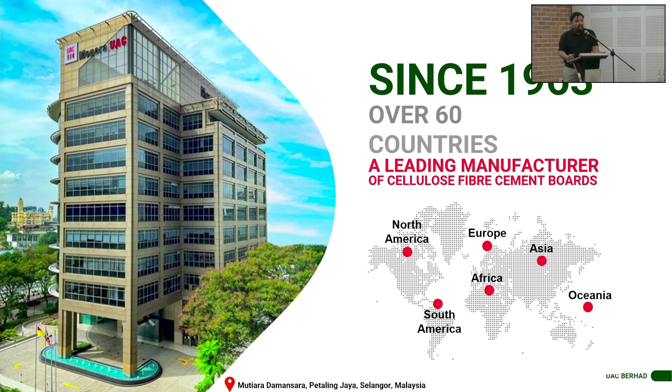I will start with our office. Our office is located in Mutiara Damansara, just nearby the Curve, beside IKEA. We've been in the market since 1963, so almost 61 years right now. Not only do we supply our fiber cement board throughout Malaysia, we currently also supply throughout the world. The most board that we export outside is to Taiwan and also England. This is because the demand is there. The usage of fiber cement board in Taiwan is very high, mostly for drywall application.

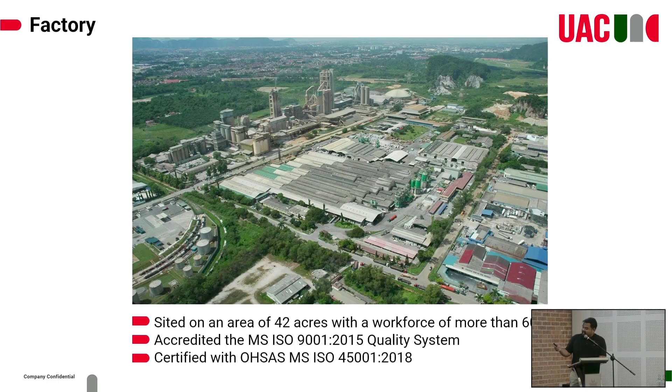A little bit of knowledge, where is UAC from? UAC Berhad is under LTAT Armed Forces and fully owned by Boustead Holdings, so we are a subsidiary of Boustead Holdings. This is our factory located in Ipoh, about 42 acres, beside Tasek Cement. As you can see, all our fiber cement board since 1963 has been produced here. Why is Ipoh the best place? Because the raw material sand contains more silica compared to other parts of Malaysia. That's why our factory is located in Ipoh. In terms of supply, everything should be no problem for local and also outside, because we already cater throughout this year. We also have MS, ISO certifications, everything.

So what is actually fiber cement? It consists of cellulose fiber from pulp tree, cement, sand, water, and some additive. After, if you can imagine, you just want to bake a cake, you put it in the mixer, depending on the thickness. If you require thinner boards, we produce the thinnest one at 3.2 mm, and the thickest one is 25 mm. Depending on the thickness, you can have various applications and various products that can be profiled and used.

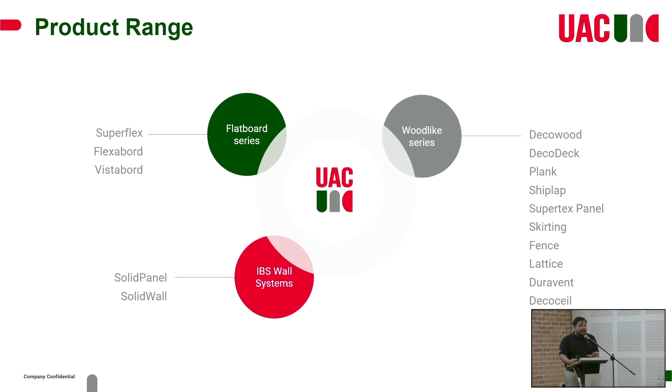For UAC itself, we have 3 types of product range. One is the flat board series, our Superflex, Flexabord, and also Vistabord. This is for ceiling application and also drywall application. Another category is the IBS wall system, which includes our solid panel, the precast for replacing clay brick or conventional bricks, and also our solid wall, the in-situ system. Another type of range is the wood-like series. This is what I mentioned, to substitute as an alternative for you all, because the nature of fiber cement board is, of course, termite-free and water-resistant. This is the advantage of using fiber cement board. Because termites cannot bite the cement, that's why we can replace or substitute for wood.

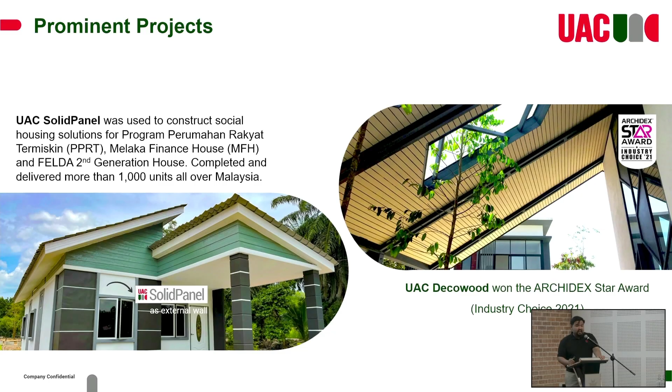For UAC itself, we are also very committed towards ESG. From 2019 until 2024, we already reduced about 12% of carbon emissions. UAC also wants to become zero emission - that's our goal towards ESG.

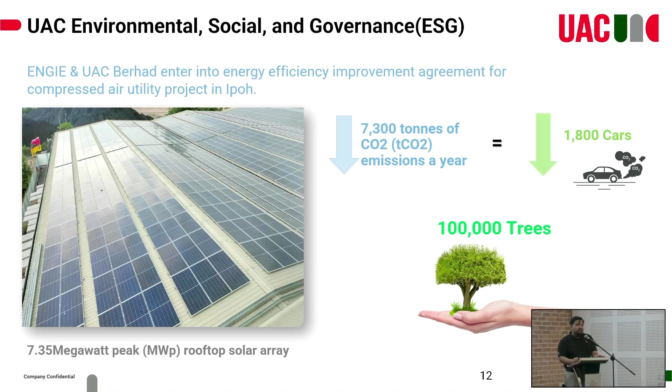In our factory currently, all 42 acres are using a solar system in order to complete our ESG goal. As you can see in the picture, currently we managed to reduce about 7,300 tons of carbon emissions, which is almost similar to planting about 100,000 trees. So when we use our solar system in our factory, it can definitely reduce carbon emissions.

I would like to talk about IBS wall first. After that, we're going to our flatboard series. After that, I will show you about our wood-like series. UAC IBS wall is actually an alternative instead of using normal conventional bricks.

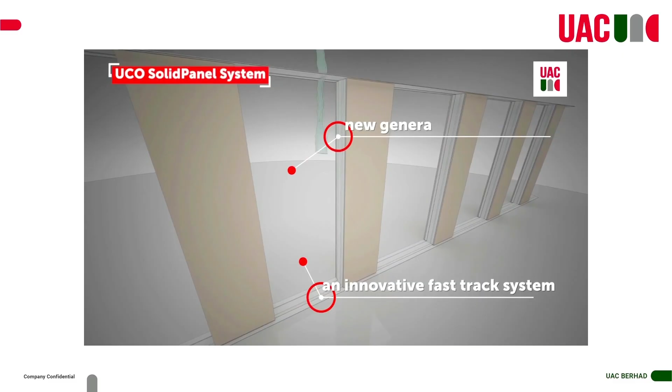I will share a video first for all of you to have a look. This is the UCO SolidPanel system, an innovative fast-track system for the new generation of walls using the latest and best construction technology. The system is revolutionizing the way walls are built. UCO SolidPanel system is an industrialized building system, IBS, certified to the maximum score of 1.0 by the Construction Industry Development Board of Malaysia, CIDB. It delivers benefits that surpass conventional masonry without the disadvantages.

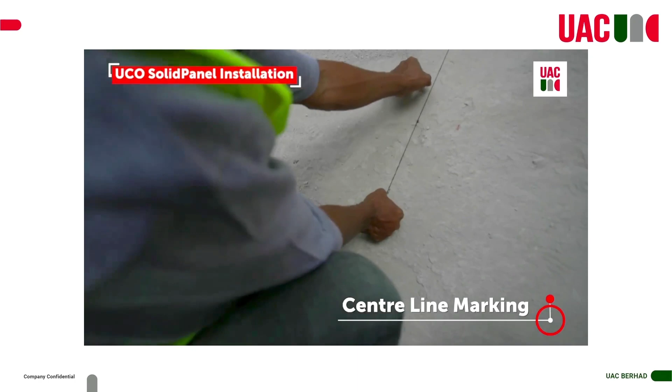The installation of the UCO SolidPanel system is as follows: plotting wall layout with the use of a laser marker or plumb line, transfer the marks onto the soffit. Fix top metal track to structural support and bottom metal track onto the floor using mechanical anchor bolt or approved equivalent fastener. Mark and cut the panels for installation. Move the panels into position. Tilt the panels to enable top tracks to slot into the cells. Mark the door and window opening to install door and window frame.

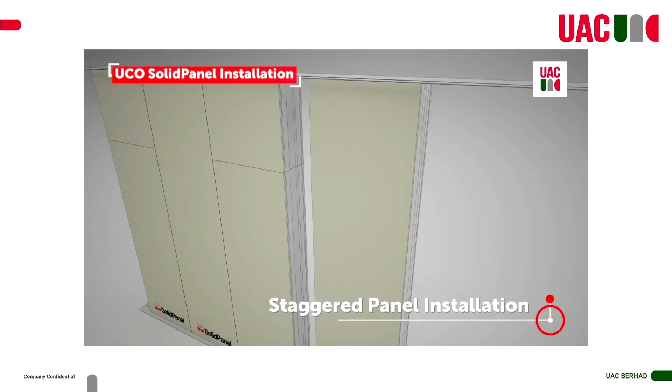Install the panel. Insert rebar for staggered panel installation method. Plumbing and electrical services can be easily installed where required. Patch with cement mortar after installation. All joints to be flush jointed with perforated paper tape and suitable jointing compound. For fixing with heavy anchorage, kindly refer to UAC's recommendations. When completed, the UCO SolidPanel system can accept a wide range of finishes, such as wall claddings, wall coverings, paints, and tile-on application.

Conventional masonry has many disadvantages: labor-intensive and slow, involves messy wet works, and a lack of skilled labor can result in internal finishing problems. It incurs expensive and time-consuming cleaning up of waste materials created by wet works. There are often delays with finishing. In contrast, the system speeds up the installation process by up to 3 times faster than masonry.

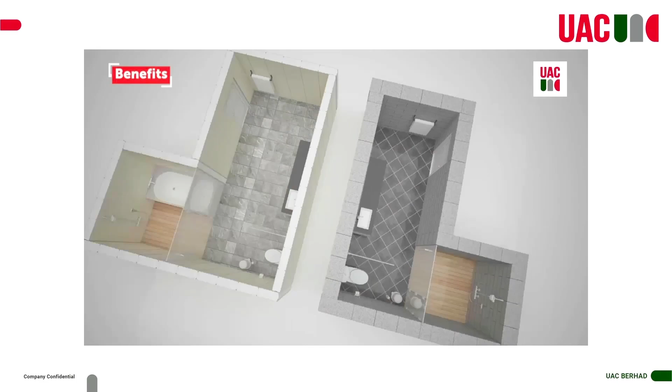UCO SolidPanel is ready to be fixed, with good sound and thermal insulation. It reduces structural construction cost by being lightweight, increases utilizable floor space, and reduces weight and thickness of the walls.

Minimal mess at site improves cleanliness and enhances site safety. Simple jointing ensures a smooth finish, no rendering is required. The result is solid and consistent quality.

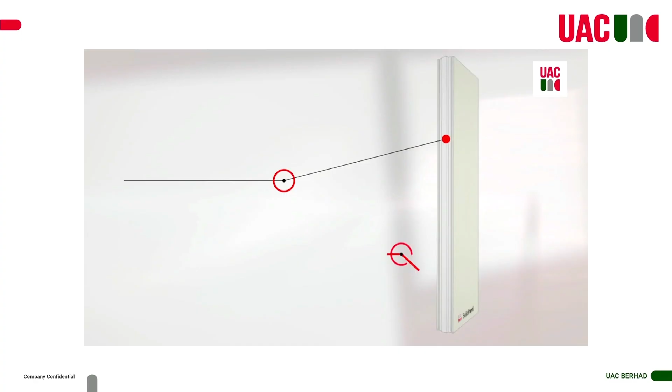Not only does the UCO SolidPanel system provide the solidity and sense of security of conventional masonry walls, it also passes the stringent and demanding requirements of wall performance tests under BS 5234 Part 2, including the sandbag impact test, door slam test, anchorage test, and heat and rain test.

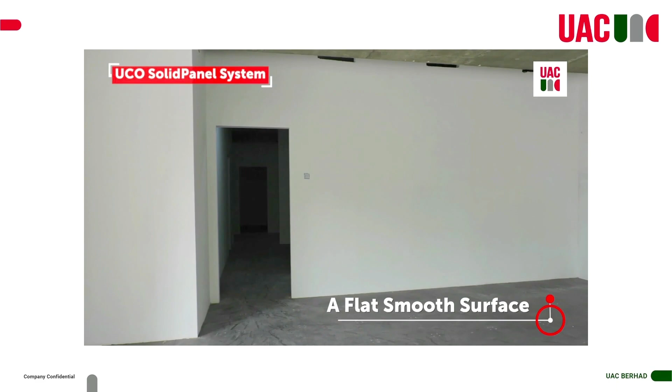The UCO SolidPanel system delivers lower construction costs, quick and easy installation, a flat smooth wall surface, solidity and resilience, and reduced waste. Its smooth finish makes it ideal for landed residential houses, high-rise apartments and condominiums, as well as commercial, industrial, institutional and leisure properties. Being lightweight, it has the flexibility to accommodate all types of floor plans.

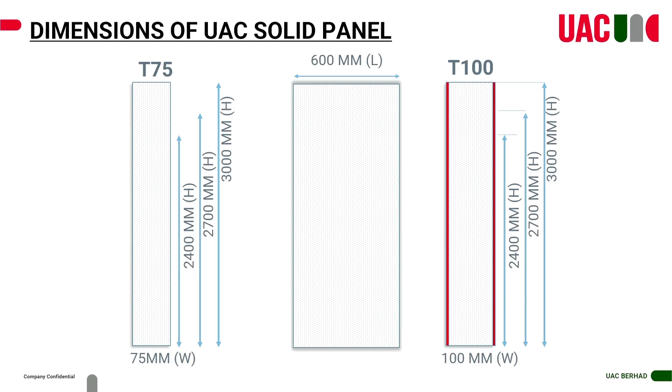Okay, this is more or less a brief introduction of how our solid panel UAC IBS wall looks. So the most important part: if you are using our solid panel, no rendering or plastering is required, because our board is our skin. That's why we do not need rendering or plastering.

So this is the dimension of our solid panel. We only have two sizes: one is T75, meaning 75 mm thickness, and another is 100 mm thickness. Our width is 600, or 2 feet, and we have three types of length: 8 feet, 9 feet, and 10 feet. The maximum we can go is only 3 meters.

So the composition inside our solid panel is expanded polystyrene, grade F, mainly for construction. If you have a lighter right now and burn it, the bits only shrink - it's not combustible. That's why we do have fire cert for this particular solid panel. Lightweight concrete, and also our skin is cement board, the thinnest one at 3.2 mm. Both thicknesses have certificate from Bomba, for the 75 mm and also the 100 mm thickness. Our density is about 700 kg per meter cube, which floats in water compared to water density of 1000.

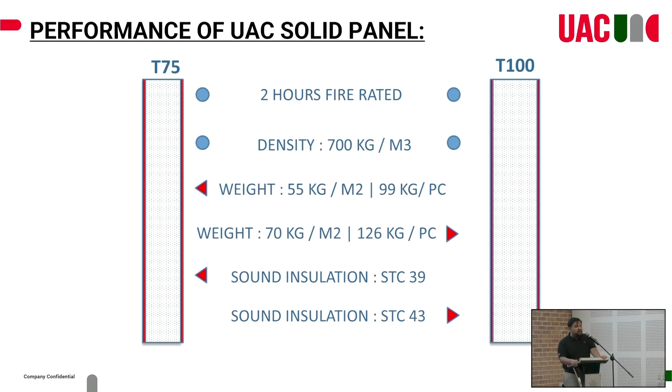If you are looking for a 4-hour fire rated wall, we also have the certificate from Bomba, using the combination double wall with T75 mm and an air gap of 50 mm. Without the air gap, you cannot achieve the 4-hour fire rating.

So if you are designing a hotel and need the requirement of STC 55 dB, we also have our acoustic performance wall combination between our solid panel together with our drywall application. Currently our total wall thickness is 159 mm, the thinnest in the market. For this particular wall, we supply to the TRX hotel currently. The opening date is about next year, January. It's almost finished at the upper level of the TRX, using STC 55 dB.

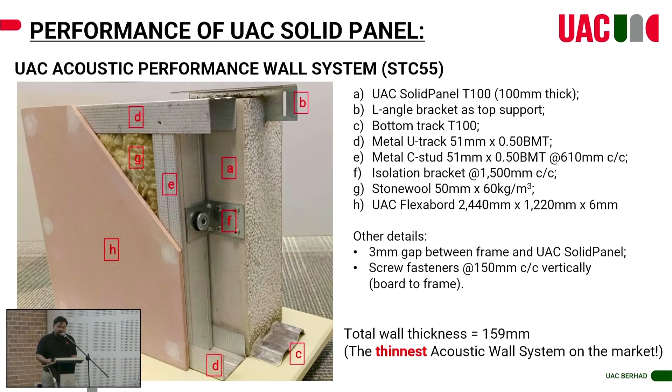So for the installation, I'll just recap what the video mentioned. It's normal, like conventional brick - you still need to mark the line. After that, you put the bottom track at the soffit. Why do we need the bottom track? To make the wall alignment, so you don't see the wall become like a snake later. That's why UAC implements a bottom track for this wall, so you can see your wall very smooth and straight in line, because our panel will sit on the bottom track itself.

So this is for box sub application - some example of how we just put the bottom track and then box the piping there.

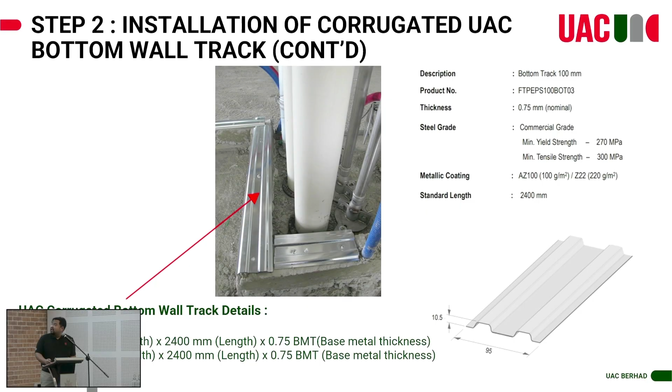So for installation at the top, we have two types of ways: one using U track, another using L angle. Why is that? Because if we use U track, you can see the lips there - if you have a particular shielding, you can cover it up. But if you don't have any particular shielding, we will advise using L angle like this, because in the isometric drawing, you can see our L angle will be embedded inside our panel, so you cannot see any lips at the soffit, on how to install our solid panel.

So this is the dimension for our L angle, and the illustration will look like this. You need to cut the panel a bit on the top side, then you just put our solid panel inside the L angle, so the L angle will hold between one panel and another panel.

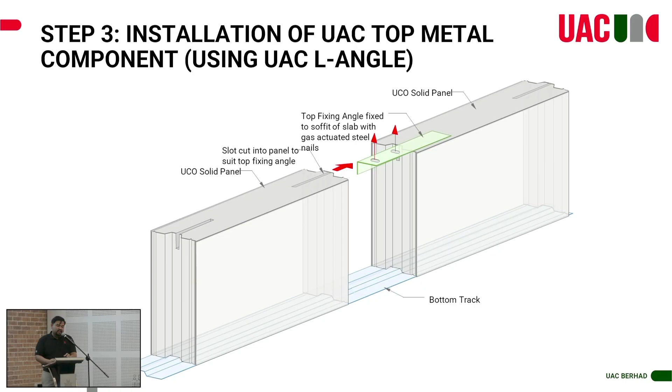So for workability, only 3 to 4 workers will be enough to install our solid panel. You don't need any machine for uplift or handling our solid panel.

For cutting everything, you just need to use a circular saw with a diamond blade cutter. So this is the dimension and method of installation.

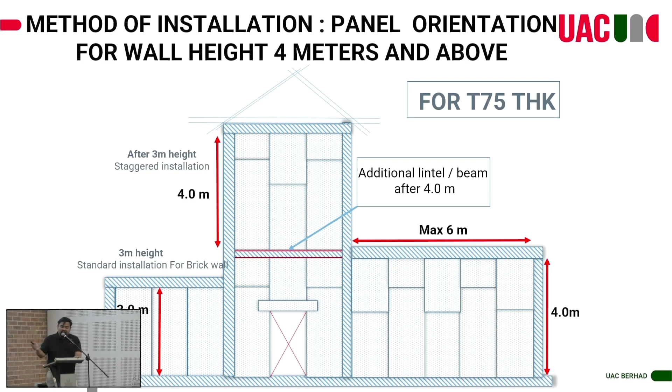For our solid panel, we don't require any lintel if we are using T75mm until 4 meters, compared to normal conventional bricks which are 3 by 3 - ours is 4 by 6. Above 3 meters, the panel must be installed staggered to improve and enhance the strength of the wall. If we use T100, we can go up to 5 meters without any stiffener or lintel, and the longest span is about 6 meters.

Between one panel and another panel, you must use cement adhesive to combine them, grade C2TES1. For the termination between another material, you need to use sealant. If the termination is between the RC beam or RC steel, also the same, you need to use modified sealant, MS sealant.

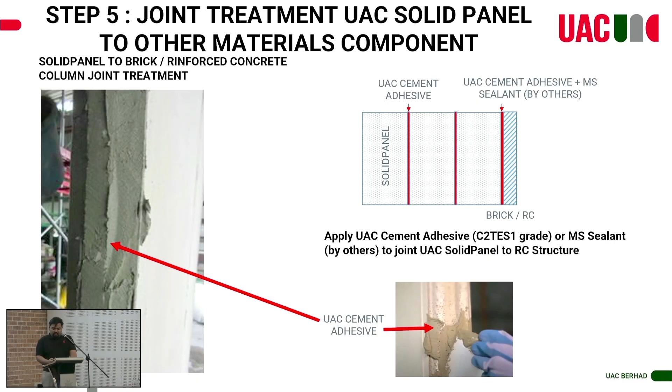Another advantage of our solid panel: you don't need to cast any lintel for door opening or window opening. This can omit the cost of the lintel - you just make our panel horizontal and it becomes the lintel already.

But there are some limitations for this lintel application. The maximum opening we allow is 2.4 meters, and the panel itself needs to sit about 200mm. So you can reduce the lintel cost, but only for normal windows and doors not more than 2.4 meters.

For penetration or installing conduits and everything, you just hack. If the requirement needs sealant, you put sealant; if it needs a fire collar or fire stop, you just put it - that's what happens. Our panel can be cut, should be no issue.

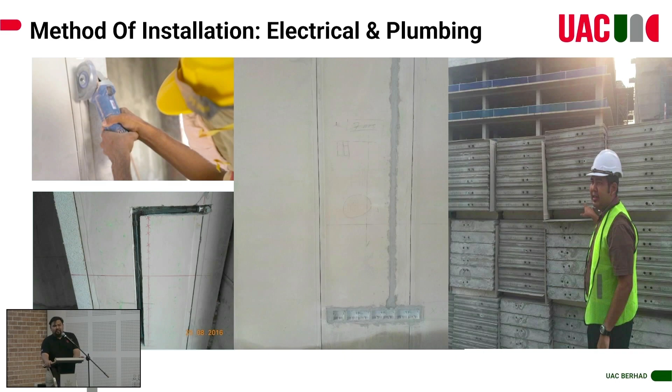For installing the conduit, even crossing from one panel to another panel is also possible. But our limitation for hacking the panel is: if you're using 100mm, we allow hacking until 75mm, and also cannot go back to back. If we're using 75mm, we allow until 50mm to be cut, and also cannot go back to back. That is our restriction or limitation.

So this is how it looks after completed. You can treat it the same as a drywall application - only termination is needed between one panel and another. After that, this is ready to paint already, no need for any skim coat or rendering on the external side.

So the illustration looks like this. First, you need to fill the gap between the panels using cement adhesive. After that, put the fiber mesh, and then use UAC jointing compound.

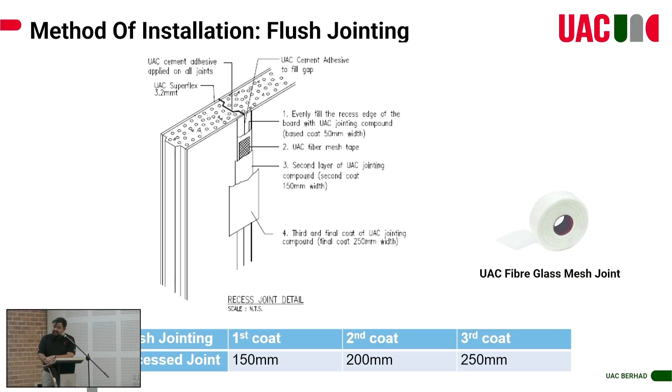For wet areas, either a drop or kicker is required, but the kicker only needs to be 50mm. You still need to apply waterproofing, same as with conventional bricks.

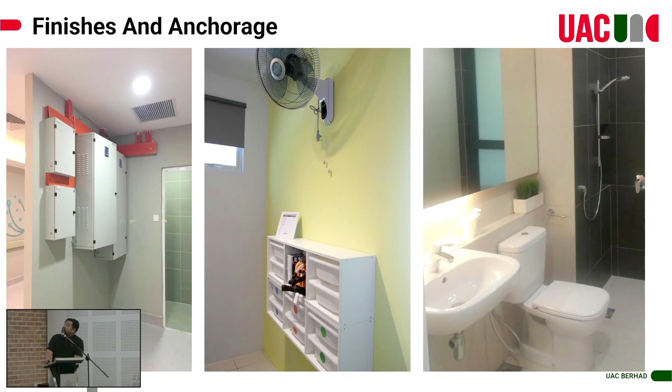In terms of strength and robustness of our solid panel, hanging a DB board, such as in the picture, can also be done, but there are certain tables required. For a wash basin or normal cabinet like this, only a normal wall plug can be used for installing on our solid panel. This picture shows how a compressor using just a normal wall plug can be hung on our panel. This is the table by Ramset.

If you can see, using M10 with a depth of about 50mm, we can go up to 0.19 kilonewton per point. So per point, using a normal wall plug can already cater to 20 kilos - should be no problem. If you need more than that, you can just use the ChemSet shown in the table below.

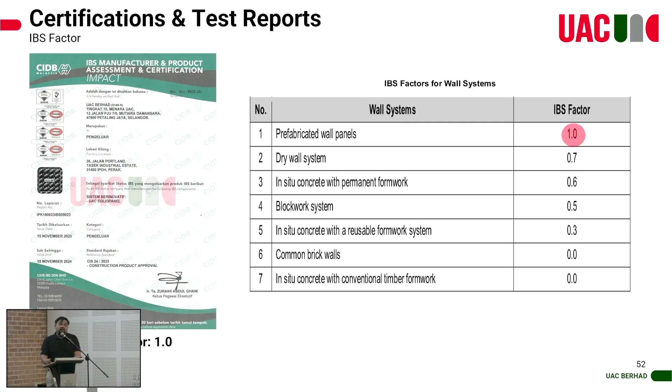So this is our certification for CIDB, IBS Factor 1. If your project requires scoring 70% marks for IBS application, this helps a lot because we consider full marks for the IBS factor for wall application. We're not talking about the structure application because mainly the 70% marks comes from the structure and also the wall.

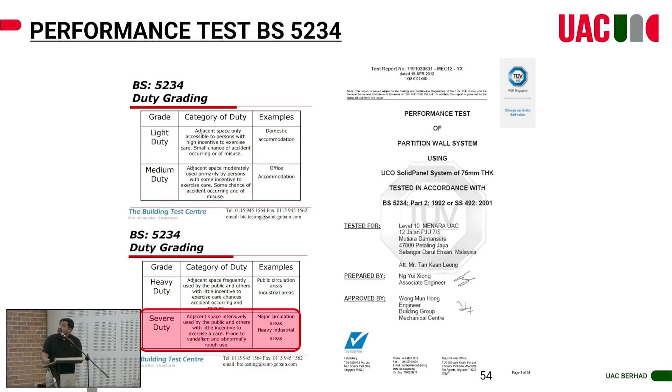So if you are looking for GBI cert, we do have it for this particular area. This is what the video mentioned earlier. The test that we done only using our 75mm thickness. Our wall falls in the category of severe duty, which can be used for industrial applications. So this is all the tests that have been done, and we already passed.

Even though our solid panel is a non-load bearing wall, we also test for load bearing wall because we want to ensure and show how quality our product is. So the test, we can go up to about 259 kilonewton for a single panel. So it's quite steady, our wall itself.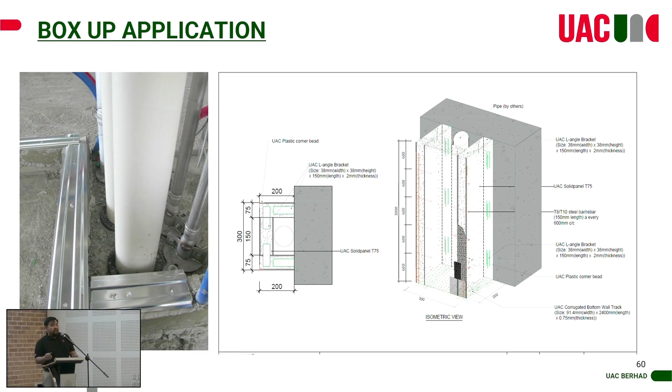So this is some illustration of how our panel works. Instead of laying bricks for this particular area, which takes a lot of space, if you are using our 75mm panel, you can fully utilize the space required for that particular area. As you can see in the left picture, the box up application can be very small. If you're using brick for that particular area, it consumes a lot of space. And then for UAC itself, we can also do openings there.

If they require some maintenance, we can design and put an access panel at the particular area. This is another example, the box up application that can be done for external application.

Another type of versatility of our solid panel is you can use it as a fin wall. Currently the trend right now is using the fin wall application at car park areas. As long as you have the parapet wall to anchor our solid panel, you can use our fin wall application. This is some example of where we already supplied our panel as a fin wall.

This is how the drawings look like, and UAC will provide this to the architect. And this is how we bind our solid panel, using either Hilti or Ramset system to bind our panel to the parapet wall.

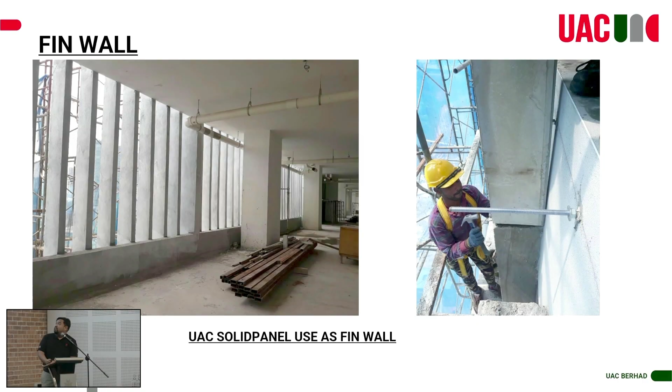So this is another example of what we already supplied in our panel. For this project, this is the combination between the shear wall application and also our solid panel as a non-load bearing wall. The white color is our UAC solid panel. They are using this, and for this particular project, because they were designing from the first place, we do have the test report. For this particular project, they managed to reduce the structure cost by 8% because of using our solid panel, since it's considered lightweight. Instead of using shear wall everywhere, you can reduce about 8% of the structure cost for this particular project.

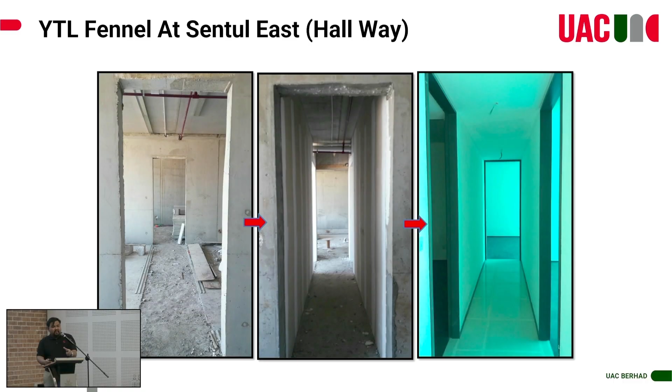So the picture shows you, if you're using clay brick with 150mm thickness, you cannot go out through the door already. That's why with our thickness, either 100 or 75mm, you can fully utilize and maximize the space required. So this is how it looks inside after finishing. It's quite smooth because our board is our skin.

So this is some of the lintel application that I mentioned earlier. Instead of casting another lintel, you just make our panel horizontal and it becomes the lintel already.

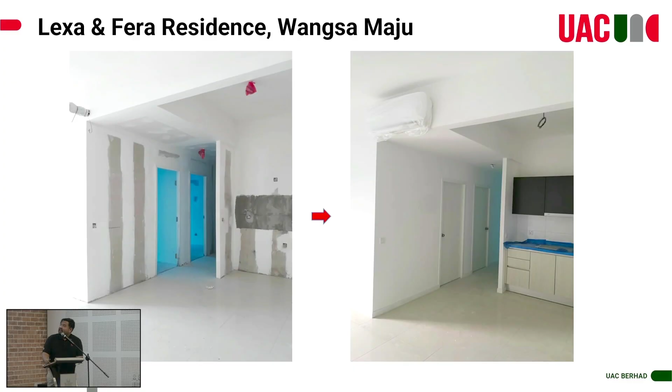So this is Lexa Fera at Wangsa Maju, using our solid panel application. You can see how the kitchen cabinet is hung there, and the tile also uses normal tile adhesive, which should be enough. No special treatment needed, you just put the tile adhesive, and then you can put the tile on our panel already.

See, this is some application. Akasa by Hapseng.

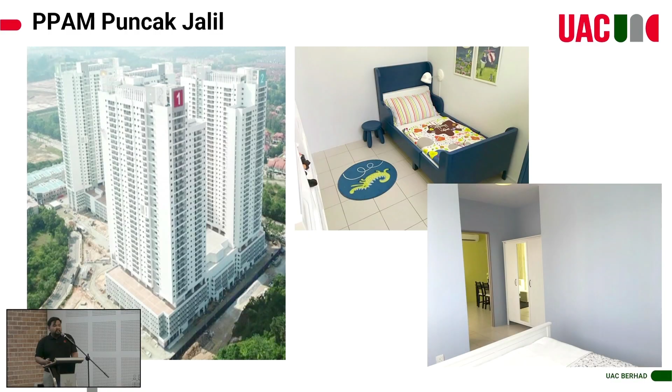Rumawip Setapak - and not only for high-rise, we also supply throughout residential projects. So this one at Setia Alam, they are using it for the internal wall. This is why they use the U-track, because they do have a ceiling for this particular area.

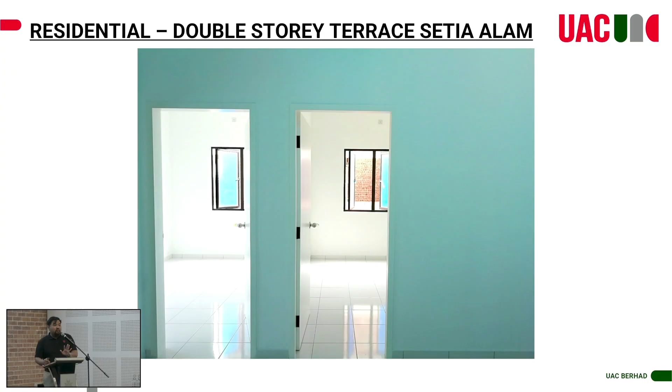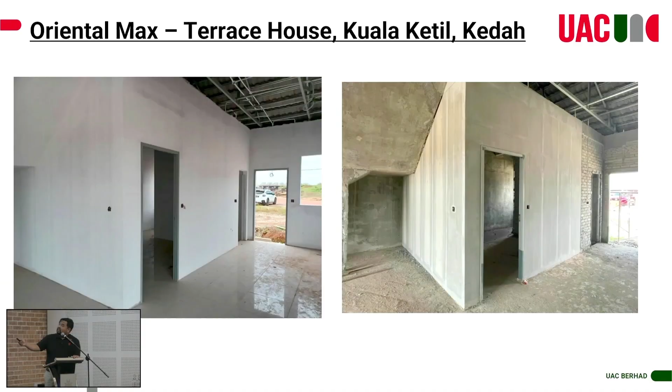This is all the residential, landed residential, using for the internal wall. So not only that, how competitive our panel is, we also can supply for affordable homes. So this shows you, we do supply for PPRT also throughout Malaysia. Not only that, Melaka Finance House - this is all the affordable homes that we supply our panel for.

TMB, Rumah Felda, Yayasan Perak.

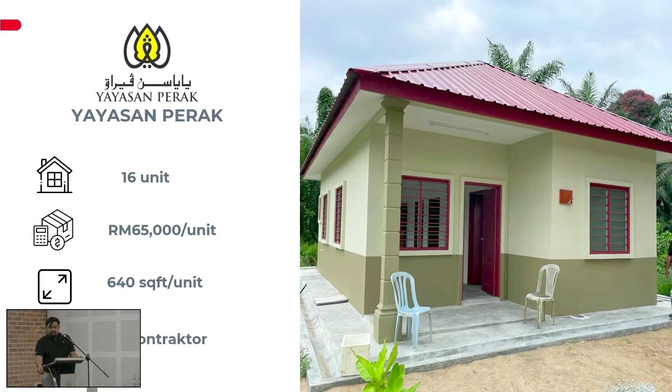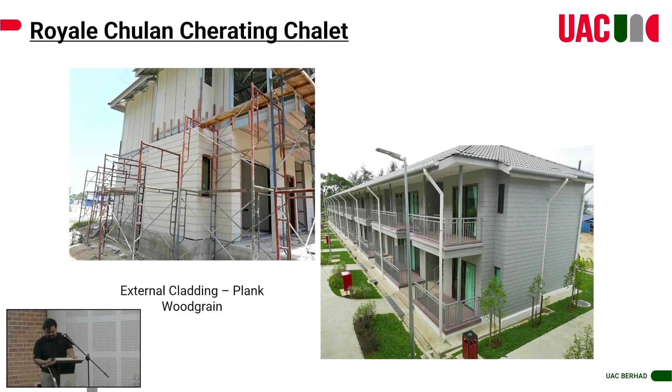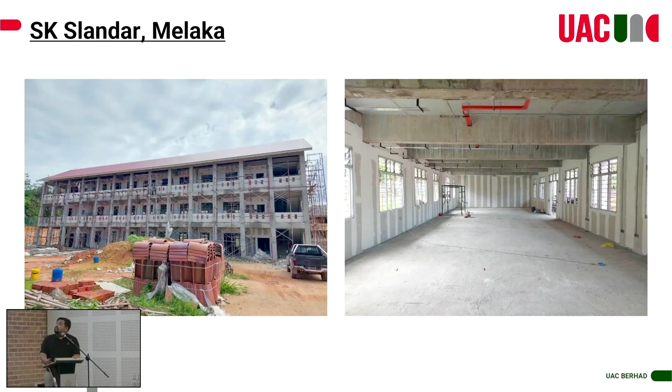Sekolah Kebangsaan Pairawak Kedah, Sekolah Hamzah - this is all the schools projects. Not only Peninsular Malaysia, we also supply to East Malaysia. Paragon.

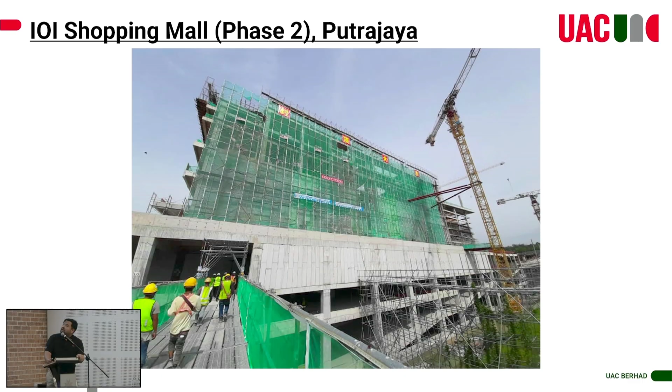For commercial it also helps a lot because there's quite a lot of partitioning inside. Some examples - Pekan Rabu, and also IOI City Mall for phase 2. Everything is using our solid panel, even though COVID was happening during that time, they managed to finish because of using our particular wall. IOI City Mall, Nucleus Tower, MBO. But for the acoustic, for the cinema, you still need an acoustic consultant to put their acoustic panel.

BHP, industrial. So before Gamuda made their IBS factory, they used our solid panel as a wall for this particular project, because it can really go fast. You can imagine, if let's say it's 12 meters there, if you do plastering work, everything is quite tedious, and the cost is also very high for plastering at that high wall. So if you use our solid panel, the plastering and also the skim coat can be omitted. That's why you can have a high wall like this built in a fast way.

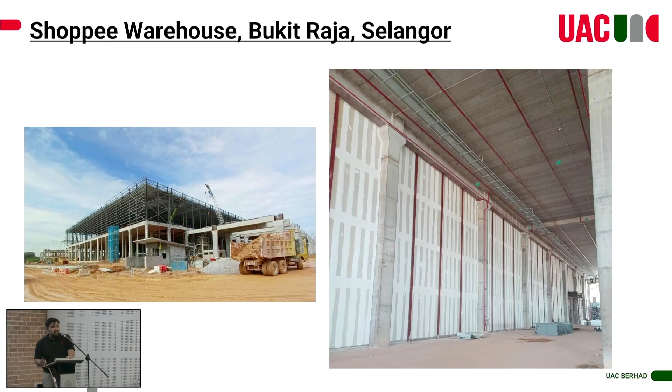Top Glove factory at Banting. This one, Shopee warehouse - mostly industrial will have a lot. Currently we supply at the data center. We managed to finish about 300 square meters per day for the wall, installing the wall panel itself, with a team of 10 people. So currently at Sedenak, they're using our solid panel as a wall - this is inside.

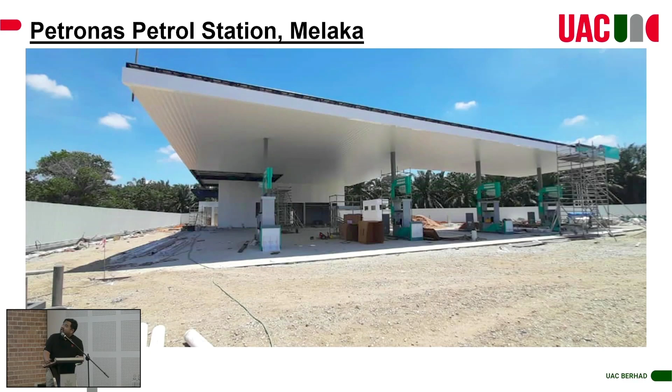Modular construction - if we are looking at modular, normally we collaborate with another party, let's say the hollow section supplier. We collaborate with them - you put our panel inside and just bring it to the site. Normally for the Petronas petrol pump station. This one is at Pengerang, also using the modular concept. Before this was meant for executives from Petronas to stay there. After the project finished, right now it's become a hotel already for this particular area, using our particular solid panel.

Hospital by KPJ. This shows how the DB board can be hung. And also the army camp we just finished for Sendayan.

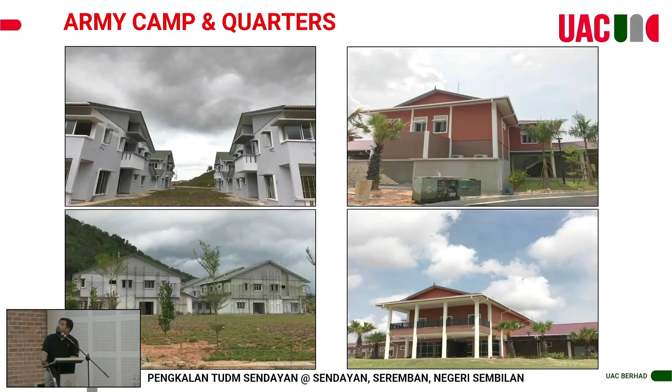Another way you can use our solid panel is for fencing, instead of laying bricks for this particular area. It's a balustrade. Okay, that's all for the IBS system.

So I will touch a bit on the flatboard series, which is considered bread and butter for UAC since 1963. We have Superflex, and also Vistaboard or Flexaboard. Why are they different? Because Superflex comes with a square cut, compared with Flexaboard or Vistaboard, which has a recessed edge between the boards. So Flexa and Vista are mainly for seamless application. If you're okay with butt joints for everything, you may use Superflex - normally Superflex is for roof eave application.

So currently, UAC before this only supplied the board. Currently for UAC, we supply together with the framing system, and we also give the warranty by the system.

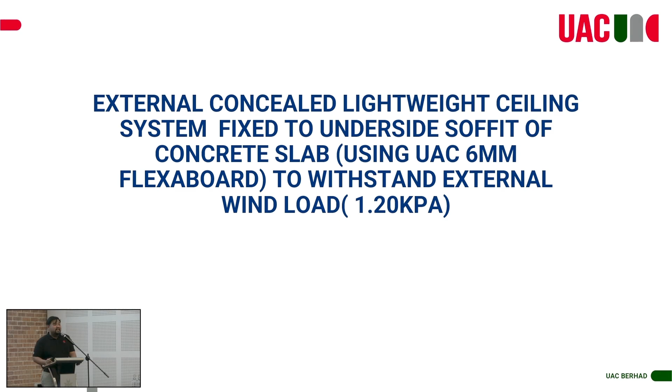Before this, many years back, UAC only produced the board and we supplied the board only. Currently we come up with the system. If you require some wind load for that particular area, depending on whether it's 0.75, 1.2 or even 1.5 kPa, we can design it based on your particular requirement and details.

So this is how it looks like. Currently, UAC supplies the ceiling framing, and we put the design criteria in our drawing. This is also given a warranty by UAC. So this is some example of how our cement board will look for the flat board series ceiling application.

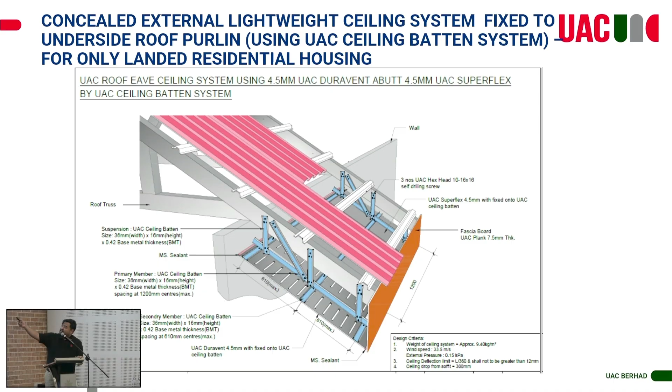And this one for roof eave is quite famous in the market currently. We supply for the roof eave. Either you want Duravent like this, or you want the flat surface, it also can be done. So this is how it looks. When you use Superflex, it cannot be seamless - there's always a butt joint like this, compared to the previous one.

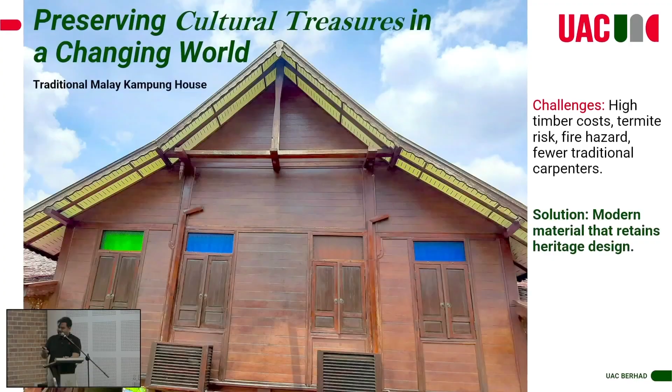After that, I will touch on our wood-like series, which is how our cement board can substitute for wood. This is an example of how we want to conserve the heritage - everything. You can use our cement board instead of using real wood. So this will look like this.

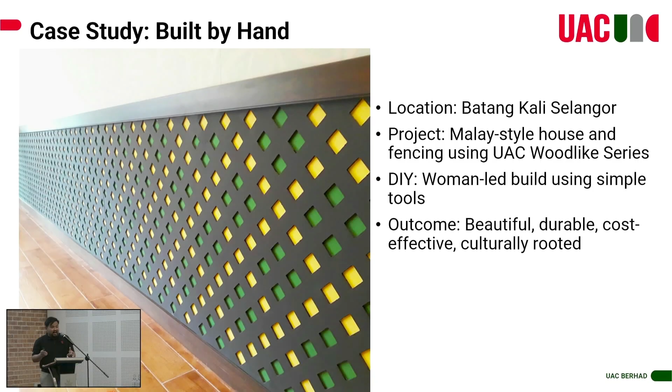So I will share you some video. This is because at UAC we also concern ourselves with empowerment. When we talk about ESG, we also try to comply with ESG or SDG, the woman empowerment aspect. So I will just show you how a girl herself, using our cement board product, can build a house and do it by herself. I will show you.

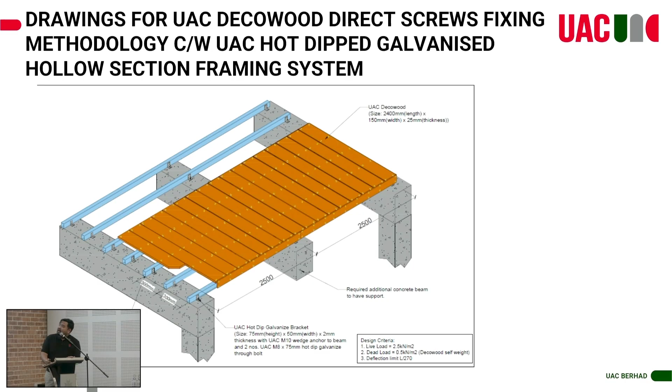This is using the normal fixing, using screw. I will show you another type of application using the conceal method, like this - you cannot see any screw at all, because we have a direct fixed clip like that. In terms of our board, it also has a groove line in the middle. This is also the system developed by UAC.

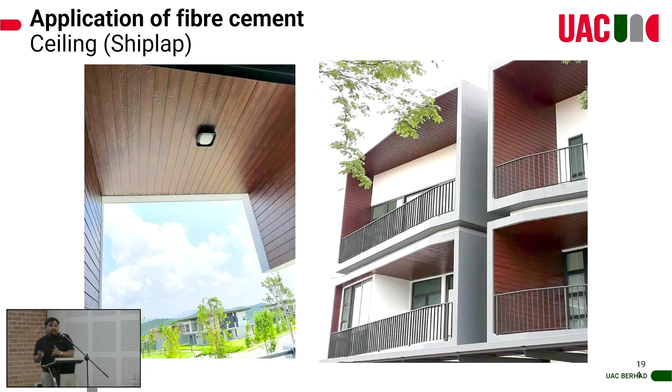This one is for the canopy at the residential there. So they are using our cement board. Normally our cement board is used for external application because of the durability and competitiveness. If you're asking me, compared to internal side, we are a little bit expensive for internal application

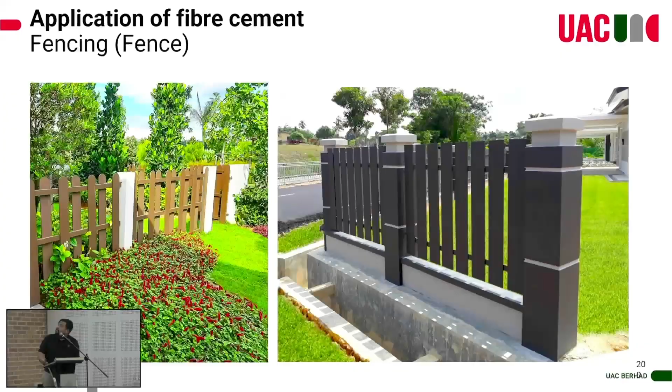This is the wall cladding application also. This is the decking application at Janda Baik. Fencing, and also our skirting. Currently our skirting has quite a high demand in the market, because the current trend is 75mm, 9mm thickness.

For the installation, you just need to apply max bond and put up our cement board, because our cement board can withstand water. Malaysians love to mop, so there should be no issue after using our cement board. Compared to tiles, our price is not much different, and you can see the aesthetic difference. We also have 75, 50, or 100 options for that particular skirting area.

So this is the green certificate, the SGBC. We also have the EPD, as I mentioned earlier.

This is what I told you before. The dimensions are all designed by the architect, so they just put the dimension, and after that the contractor needs to cut it at the site. Compared to wood, which is easier to cut, our cement board is quite hard, but it can still be done instead of using wood.

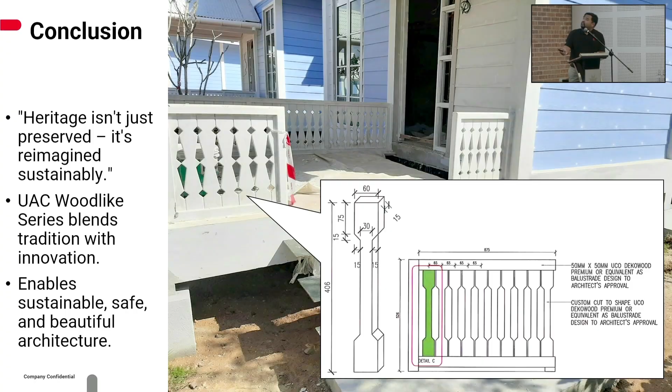I've been told that the Q&A session will be after the presentation, so I'll hold off for now. The Q&A session will be at the end of this program. Thank you, and thank you all.

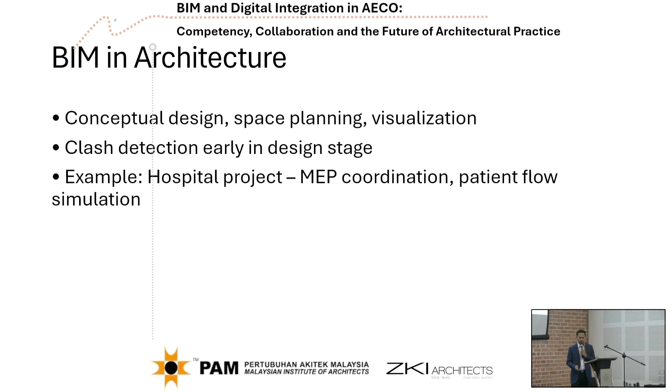Okay, I also run through a lot of slides based on our experience, our project. BIM in engineering essentially involves structural, mechanical, electrical, plumbing, 4D scheduling, and construction simulation. When you link your, for example, Navisworks with Microsoft Project or Primavera, then you can do the sequencing.

And then BIM in construction, this is the critical part in Malaysia, especially when we did our hospital Kajang project, where we have handed over LOD 500. It was quite challenging because the project did go through the pandemic, the MCO, and finally we managed to complete. But when you do LOD 500 or BIM level 3, integrated BIM, you need contractor, okay?

The manufacturer, subcontractor, fabricator, they also have to use BIM. And that is also part of the requirement under JKR requirement. And that is the hardest part to achieve, because most of them were not ready, and they decided they have to comply with the requirement, but they have to outsource.

But the biggest challenge still is not about software or hardware or even competency of BIM personnel. The real challenge is decision-making process, procurement process, and also contractual clauses in the current delivery process.

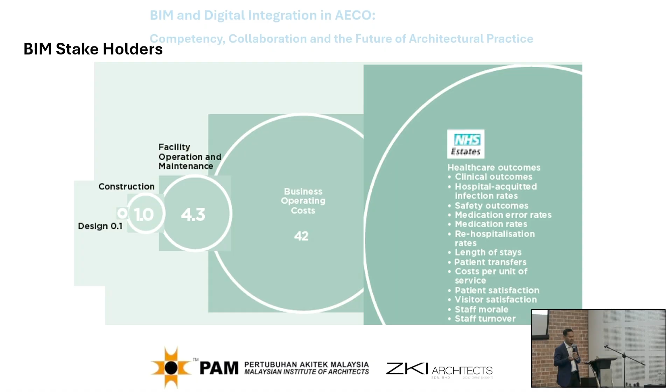Can you keep wasting? You know that you're wasting, and BIM is the way to go to avoid that. Proven, that's why JKR has adopted it as mandatory. Okay? Alright.

Okay, BIM and AI. We are at this stage where most software manufacturers are still experimenting with generative AI. Either you do text command or simple language—they call it ML, machine learning, or using LLM, large language model. But software like Rhino, Grasshopper, or even Dynamo are developing this in tandem with BIM. BIM has the information, but how you use that information inside BIM with AI, machine learning, to make the whole process more efficient.

Starting from conceptualization until operation, more efficient. Machine is good at doing things that are repetitive, that require no creativity. So whatever machine is best at, let them do it. For example, this is the overview.

If you were to do different options at conceptual level, with all the models for all the study you want to do—if you were to do 3, I remember we did the school design. The client asked for 3 design options. How long will it take? 3 concepts, 3 designs. We have to mobilize our design team, 3 different teams, 3 different designs, and present. But with BIM, at the conceptual level, you can analyze and study—we call it optioneering—very quickly.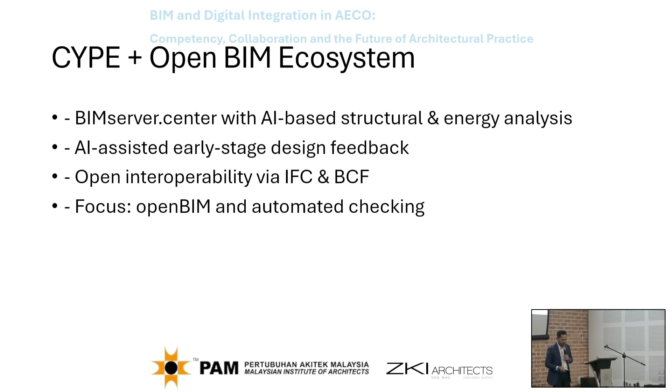I encourage it - CYPE is a Spanish-based software vendor. They have AI-based structural and energy analysis already, AI-assisted early stage design feedback and so on. So go and check out Open BIM.

This is IFC under Building Smart International, for interoperability to support AI metadata. The good thing about AI, BIM, and cloud-based systems is you can interconnect in real time in the cloud.

AI is machine learning, ML. LLM, large language models, can educate themselves, they can update themselves. Imagine, while you sleep, they keep learning, and when you wake up, they update you. But of course, as projects get more complex and bigger, the expected deliverables become more comprehensive, because they know what AI is capable of.

Just like people say, how many steps did you walk today? Because you have AI in your watch - oh, I've walked 992 steps. How many calories of intake energy today can you record? From there, they can analyze how healthy you are today, how much you've contributed to clogging your blood vessels today.

Similarly, yes, you can do that to that extent, to that detail, because of the machine's capability. Remember, those who are my age, I used to do 3D Studio DOS rendering at 4 megabytes of RAM. Now they're using 64 gigabytes of RAM.

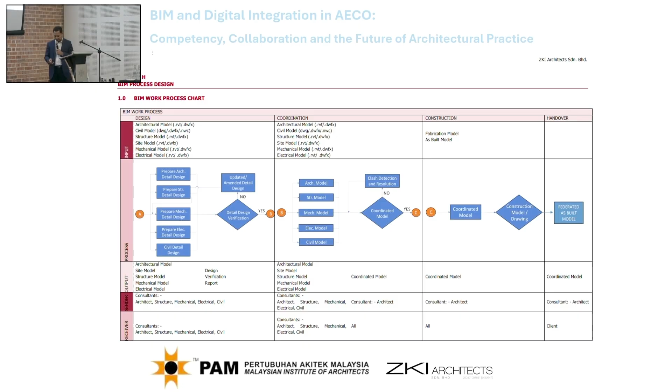For architects, just to dive a bit into this - in terms of concept design phase, it can generate faster massing, facade design, conceptual model studies, and optioneering. I call it optioneering - last time you only had 2 or 3 options, but now within the same time, maybe 1 week, you can have 20 different options.

And we have 3D printing now - we can print a model in about 4 hours. It's cheap now, you can buy a printer for 5,000 ringgit, for a 300 by 300 model, using 50 ringgit per roll of polymer - they call it polymer wire. And then you can do all the analysis, or even just hold it - some clients like to see it physical, but you can just do 3D printing.

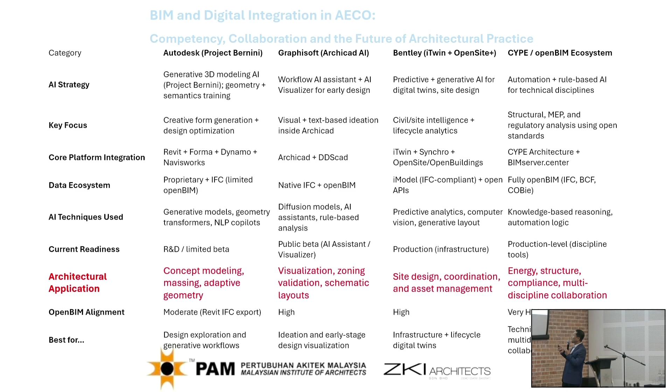In terms of architectural application, you can do concept modeling, massing, adaptive geometry, site design coordination. You can use LiDAR - now with point cloud, 3D scan, LiDAR, even surveyors might lose their jobs, with accuracy of 2mm. So you can do that in minutes, literally in minutes. This is coming into our way, along with energy analysis among different manufacturers and so on.

Right, so skill - these are the areas that we need to look into.

In terms of even scripting, it's not that difficult. Now even at SPM level, they start teaching Python, SQL, C++, because AI will help you learn as well, and then you don't have to do all the little scripting, if, then, else, and all the brackets we used to do. Now it can be done easily, and then you test and run it. It's a good hobby also if you were to try this, just like playing with a puzzle, but it can be done very fast nowadays, right?

So this is what I would like to highlight. It allows architects to automate BIM tasks via plain language and commands. They can interpret using large language models. These are our projects, just to give you some idea what we have done so far, under JKR workflow.

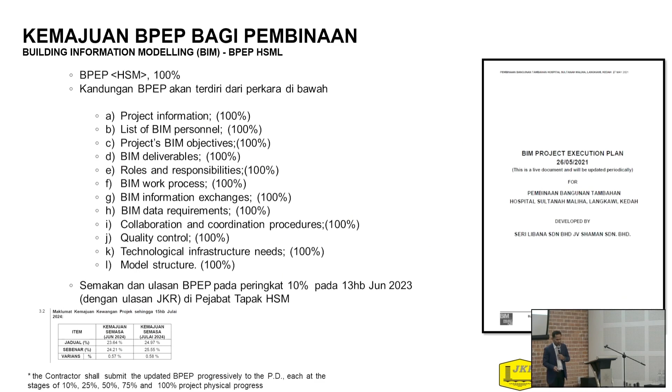Say BIM, you have to do it. As I mentioned earlier, there are 3 ways, and the third one, you have to learn through doing, because every project is different - different problem, different scenario, different complexity, different team. The social aspect of BIM is very important. As a BIM manager, sometimes dealing with technology is easier than dealing with people.

So this is another issue. This is the project in Langkawi, currently about 25%. You generate literally about 15,000 drawings in 2 months, with all the RDE - room data elevation. How many? This is just one simple example. You do all the fabrication drawings and so on.

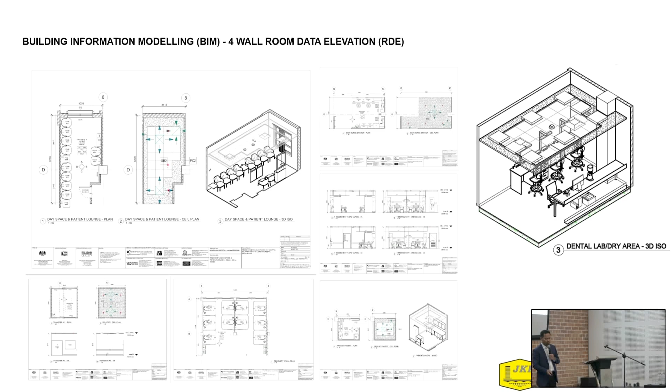Imagine if you were to do this manually using AutoCAD. The checking is all done using cloud - they can do the comments, and then the modeler will take from this. We just manage this, and this is also accessible. We did the 4D simulation as well - you link the BIM model in Navisworks using Microsoft Project, so you can do the simulation.

This is for quarters. Clash analysis is done automatically using BIM Collaborate Pro. You just need to do the coordination space, then include whatever discipline model, and it will do the clash analysis where it used to take a long time using Navisworks - structure versus architecture, structure versus plumbing, one by one, right? But now it just does that in a matrix, like hundreds of different clashes versus what, automatically in the cloud.

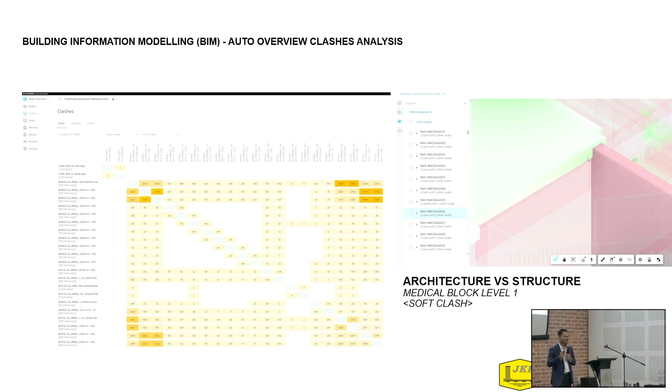It's just like when you do network rendering - when you do your own workstation rendering, it takes 1 hour, right? When you do network rendering, it takes 1 minute. Just like that. This is where we integrate Navisworks, either using it to integrate the Civil 3D model, which is in DWG format and in meters, with the Revit model in millimeters. You can switch between Project North and True North, and coordinate with infrastructure and so on.

And then you do the coordination, visual checking, auto clash analysis, and the actual implementation on site. This is the actual implementation on site, some of them the sequencing. Of course with a computer you can do anything, but the hard physical pipe - you know which one comes first - still needs coordination at site at LOD 400.

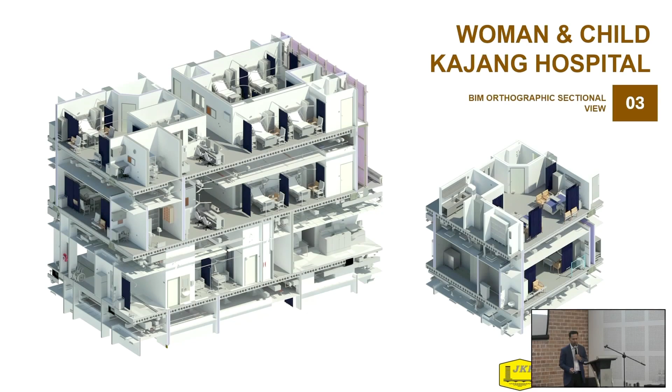This one is already completed at LOD 500. Took us 7 years to complete. It was quite challenging, but we did it, even though not fully satisfied 100% with all the constraints. This is one of the section boxes taken from Hospital Kajang.

So all the drawings generated from the BIM model - structure, services. This is an example where we do FM at LOD 500, for RNR.

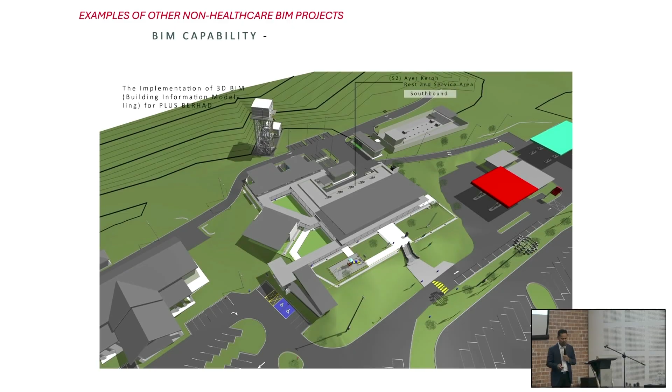The problem with this project - we did the point cloud scanning, and then converted into Revit, but whatever embedded or concealed you cannot see, and you have to guess. The best is, and that's why JKR makes it a point that for JKR projects it's mandatory - so you know the routing, the pipe running, the conduit, and so on inside, or even underground services.

So this is the API that I was talking about. We have our own programmer - I do a bit of programming, but not much. So you can come up with your own dashboard with all the pull-down menus linked to Autodesk Forge. Even now with Collaborate Pro, you can link it also, and put that under other cloud-based services like Microsoft Azure or AWS, Amazon Web Services, and so on. So you can customize this.

Okay, this is the school that I mentioned. This is the first project where it's conventional, but they will use it up to LOD 500, meaning the contractor will also have to use BIM and hand it over to JKR for operation and maintenance with SBIM model.

This is the one that I showed you. We did 3 options design. With BIM, of course, it's much faster. And sometimes the option is just the variation in terms of facade or layout design, but the room layouts are all the same.

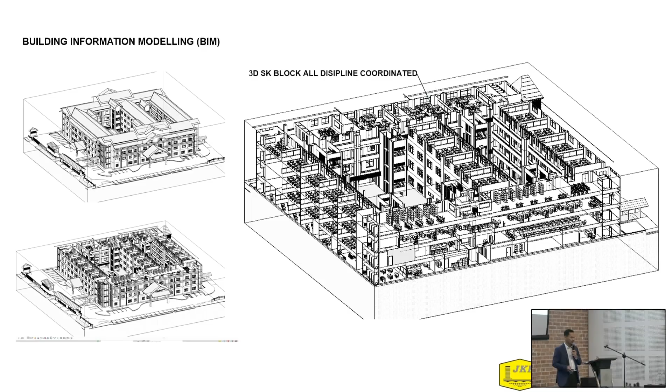Okay, just a quick example. Even though it's a school, because of the lab and all the classroom layout, they want it to be quite detailed with the built-in and so on. The underground services, now it's under construction. Okay, the civil work.

Okay, we come to an end for Q&A.

So, in order to stay competitive, yes, you have to embrace AI, because AI is just like your vehicle. If you used to ride a bicycle, but now why do you ride? You drive your car. We used to walk, but now we take aircraft. Otherwise, you will be left behind, right?

So it's a combination of design intuition. Okay, nobody can replace the human mind, no matter how Elon Musk comes up with Neuralink and so on, AI.

We are the only creation that can conceptualize. We can conceptualize. That's why we can go beyond space and very deep inside the sea, because we can conceptualize and create to serve humankind.

All right, so that's all. AI will not replace architects, but architects who use AI will replace those who don't.

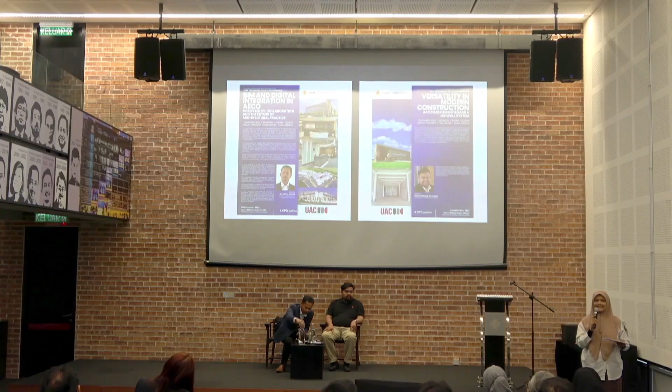This is the era, because it's going to change in a few months. Probably another tool is coming out, and then you'll say, I just learned about ChatGPT, now I have to learn about something else. Within those 2 classes, in a 3-month gap, there was a new version where you can do prompting.

They came up with a simple advertisement, with people walking and moving, just within a few months' gap. So if we don't take the challenge now, we might lose, not I would say the job, but we'll be losing the grip to be part of the new technology.

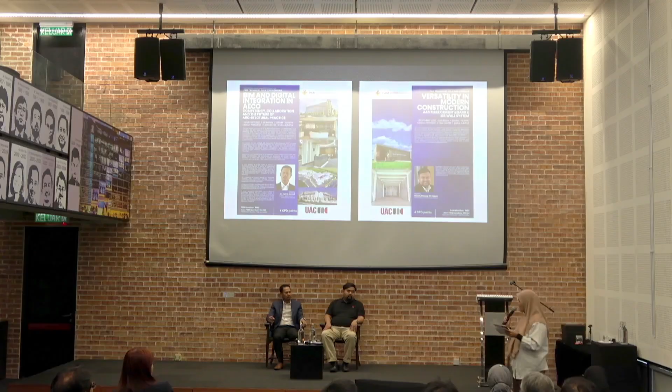Do you have any experiences with that, and would you recommend it for us to use? That's one. Number two, how do we convince an organization that it is good to invest in BIM Collab Pro? Because I have had experience with it, but in my new organization, they considered it an expensive option, a bit too much for the usage right now. But we are expecting a few projects coming up, so I do foresee the need for it. So your advice, please. Thank you.